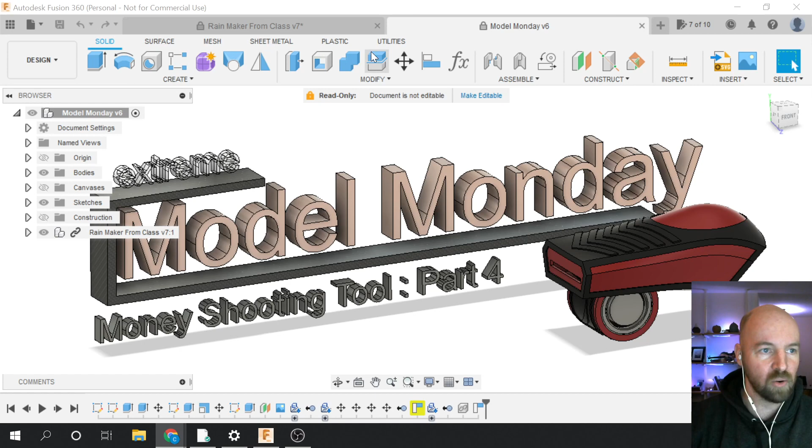All right, so I'm going to go to my Rainmaker document here, and I've got my body active. Let me go ahead and change this — this is for prep. So that was just what I was making, doing a little test there.

I always tend to do things a little bit differently, try to make things a little bit better, because I end up making 3 or 4 of these drawings as we go. I do one for myself to work things out and figure out a design, and then one that's like, all right, can I do this start to finish a little faster? And then the one I do for class here, and I end up making refinements along the way.

And the refinement I wanted to make, most of it, was to the mold part. So we're going to dive in here. I'm going to start by making a new component, and I leave it up to you, your organization, if you want to make this new component.

In fact, I think I'm going to make this component inside of my body component. So the mold that I'm making here is going to live inside of my body component. I guess that makes sense to me. Also, we're going to be using parts of this body in order to make our mold, so we're going to make it inside of this body component. So I've got my body as my active component here.

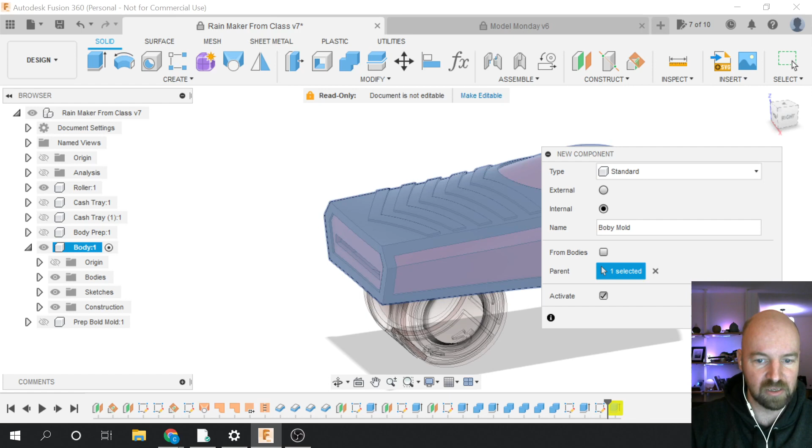All right, so now we've got our body mold highlighted here, and the first thing we need to do is use the surface body that we used to create all of the other parts of our tool. In order to do that, we're going to go ahead and need to make our body.

Actually, I wonder if we can just spin this down. Yeah, so my body mold is still my active component, but I've spun open the bodies folder in my body component just so I can see this surface body. This surface body is the one we had been using to make all the other parts of our tool here, and we're going to do that same operation here.

So with my body mold as my active component, I'm going to switch to the surface creation workspace, and from the create menu I'm going to choose our favorite command from this surface workspace, the one we've been using a lot — the Thicken command. As the face to thicken, I'm just going to choose the main body surface from our body mold here. What that'll do is use that to make a new body inside of our body mold component, if that makes sense.

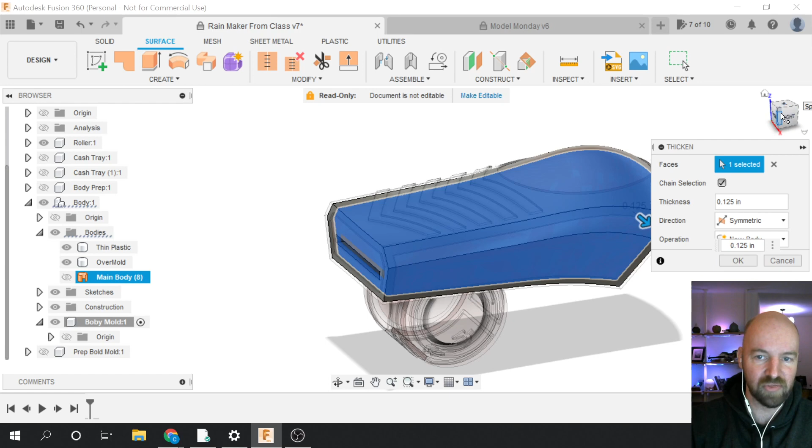And we want to make this the thickest one yet, so a quarter of an inch works for me. Quarter of an inch will expand — oh, errors. I did it the first time, made a quarter of an inch, no problem the first time. Oh, because I'm accidentally doing it symmetrically.

All right, one side. So I made a quarter of an inch, and what you want to make sure you're doing here is fully encompassing all of the parts — you want your tool to live inside of this body. So here, if I make this 0.2 inches, you can see I've got parts poking out here. The detail part of my overmold is poking out, so I need to make it just thicker than that. Doesn't need to be a lot thicker, but just a little bit thicker. So a quarter of an inch worked good for me, and then I'm going to say OK.

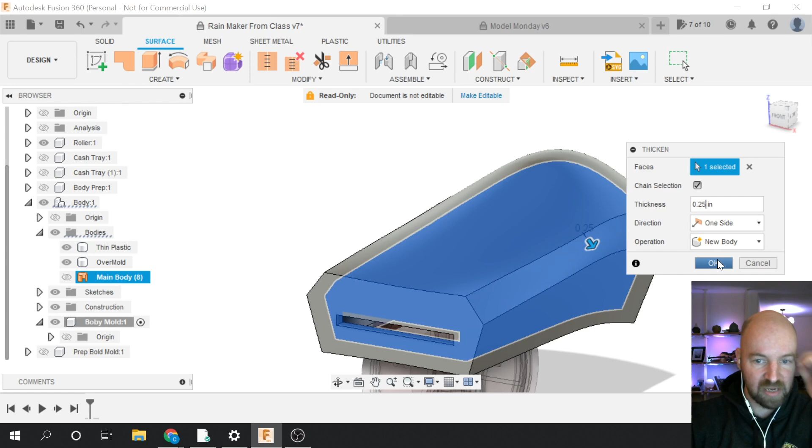All right, so now we're probably not going to need that body's folder anymore inside of this body, but our body mold component is inside of this body component here, so we will need that.

So the next step is we need to make this mold so we can separate it into pieces. It needs to be made of probably 4 or 6 different pieces that get fastened together, and then the rubber gets injected inside of it.

And in order to fasten it, we're going to need like wings, I guess you could say. Flanges is probably a better word, in order to fasten the parts together. And we're also going to need to split up this body. So let's start by doing that.

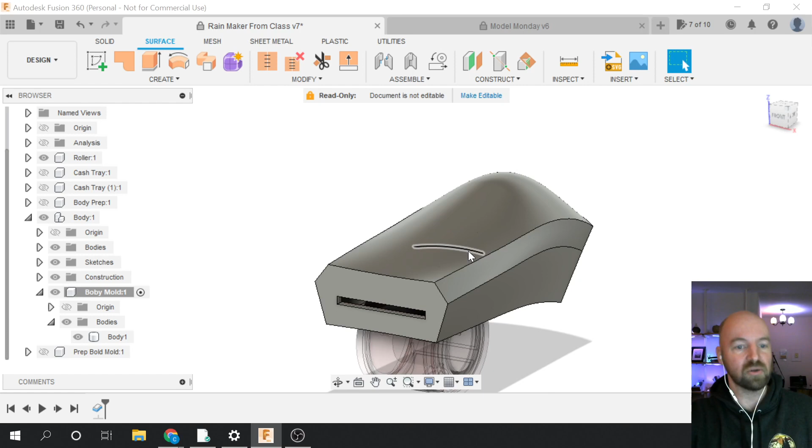Let's make our flanges first. I'd like to have a flange that's associated with each of the 4 kind of corners of my tool here. So if we can imagine kind of like an X here, I'll have flanges that are associated with each one of these corners.

So what I'm going to do is first create an axis. I want to have an axis that goes from this point here all the way to this point back here, just because those 2 points kind of represent one of those wings of the X that we're going to be making.

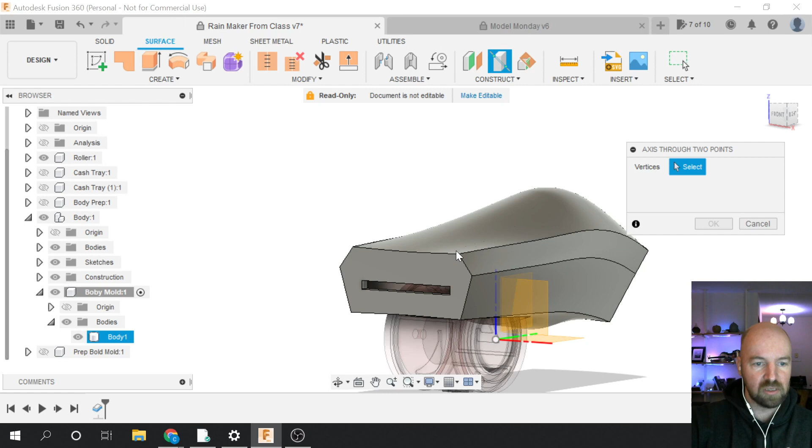So if I come up to the construct menu, we can choose an axis through 2 points. Select a point at the front, and then a point to the back. Again, I'm kind of imagining this as like a 4-part mold here when it comes to the top, sides, bottom, and the other side, so we kind of want to divide it up like that. So I've got an axis that goes through from front to back here.

And now from this axis, I'm going to use this axis to make a plane at an angle. It's kind of a long walk here to make this flange, but as we keep going, you'll kind of see the process unfold here, hopefully.

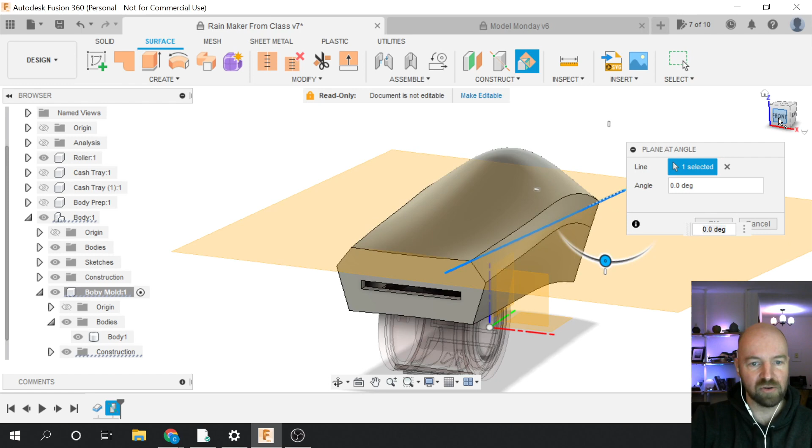So from that axis, I'm going to make a plane at an angle. In the construct menu, I'll choose plane at an angle. I'll specify that axis as the line that I want to make my angled plane based off of, and now I'm going to spin this around to 45 degrees.

We want it to be a 45 degrees like this, as opposed to a 45 degrees like this. So this is negative 45 degrees for me, but depending on how your model is oriented, positive 45 could be the right answer for you. But we want it to be a plane that doesn't cut through the center of our tool, it kind of runs tangent to it. And I'm going to say OK here.

This has been a long walk, but we need to make one more plane, and that's going to be an offset plane from this plane. Sometimes I like to make these planes reflect the things that are going to be on them, so you can always hover over the side of this plane and shrink it in or out. Again, this is just a purely visual representation. These planes go on infinitely, but it's nice to keep things visually organized and not have giant planes for things that are real tiny.

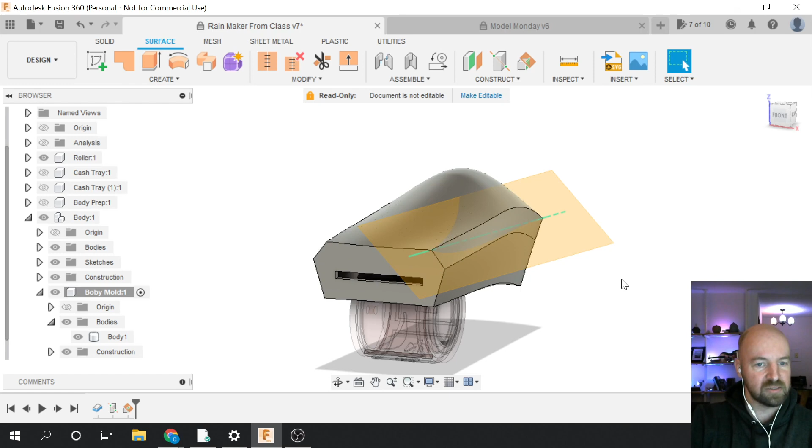All right, so the last plane that we need to make here is a construction plane that is an offset plane. We're going to offset it from that plane that we just made by 1 inch.

Now, 1 inch is good for me because I don't have any really big bulbous areas that are encroaching way out here. So if your shape has areas that encroach and get bulbous out towards the edge, we want to have some meat - this shortest distance between this plane and our tool is going to be the shortest flange that we're able to clamp to. So if your plane is kind of close to your body, you might want to go with more than 1 inch, but 1 inch seems good for me. And then I'm going to say OK.

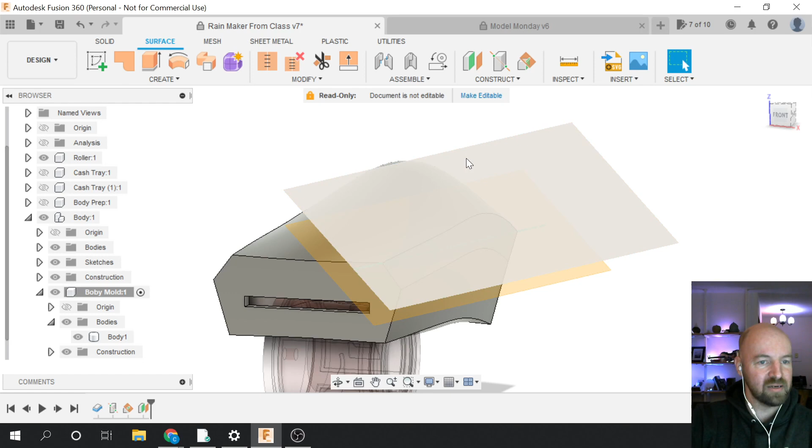Now, finally, we can make a sketch. So on that plane that we just made, let's go ahead and create a sketch on that plane. From the Create menu, I'll choose the Create Sketch option. And then, because I've got a lot of planes going on here, I'm going to make sure that I click on the plane that is furthest away from my body as the plane that I'm creating a sketch on.

And now, on this plane, I want to project this curved line. This curved line was kind of the basis for my axis that I made. So this curved line goes from one side of this axis to another, and it's kind of one of the 4 X's that we're going to be making here.

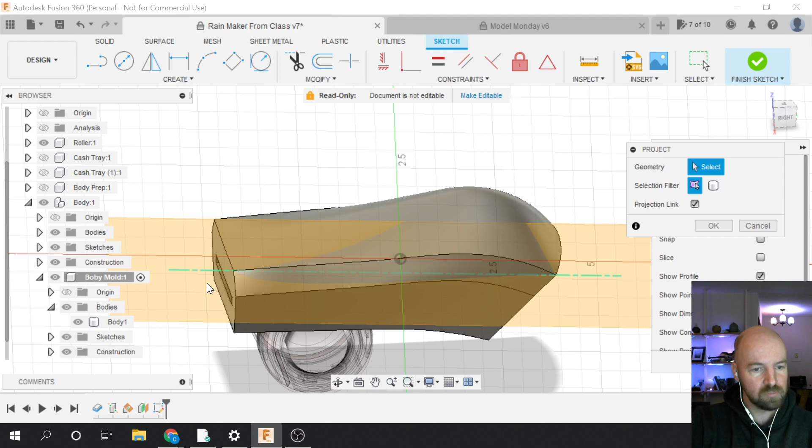So in order to project that line over onto this sketch that we're making, from the Create menu, I'm going to choose the Project option, and then scroll over to Project. Now I'm going to hover over that little curved line there, highlight it and click on it one time, and you can see I'm projecting over that purple line there, and then I can say OK.

I wonder if we don't need to. Let's try to roll with it like this. In my earlier drawing, as I was prepping for class here, I extended out these lines a little bit. I made them go beyond the body here, but that made me run into problems later. So we're going to wing it here, and we might need to come back and extend those lines out. So now that I've got that line projected, I can go ahead and say Finish Sketch.

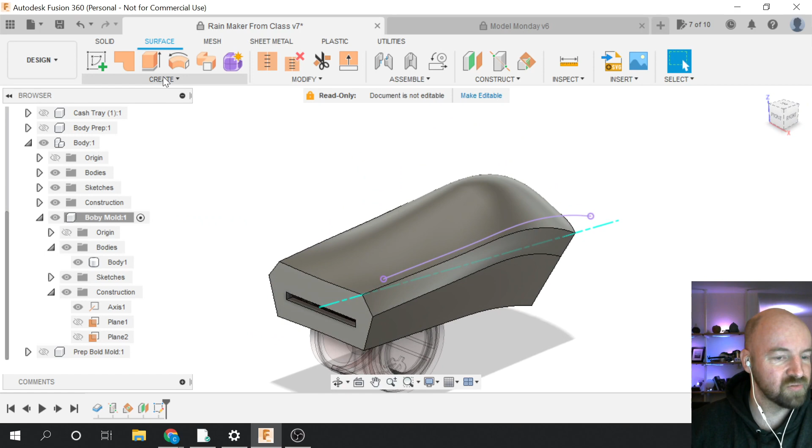And now we can create our first flange. In order to create that flange, we're going to start by extruding out this line. In the surface workspace, you can extrude just a line. So from the Create menu, I'm going to choose the Extrude option. You always know when you're in the surface workspace because all of your tools are orange, as opposed to the solid workspace, where all of your tools are blue. So I'll choose this orange Extrude option from my Create menu. The profile that I'm going to extrude out is that weird curved line.

And now I'm going to extrude this towards my tool. I'm just going to make sure I go inside of that tool. So this would not be far enough. I've not gone into the tool, and we want to go inside of the tool a little distance there. That excess will get cut off later, so you want to go inside of your tool mold body there. All right, and then I'm going to say OK.

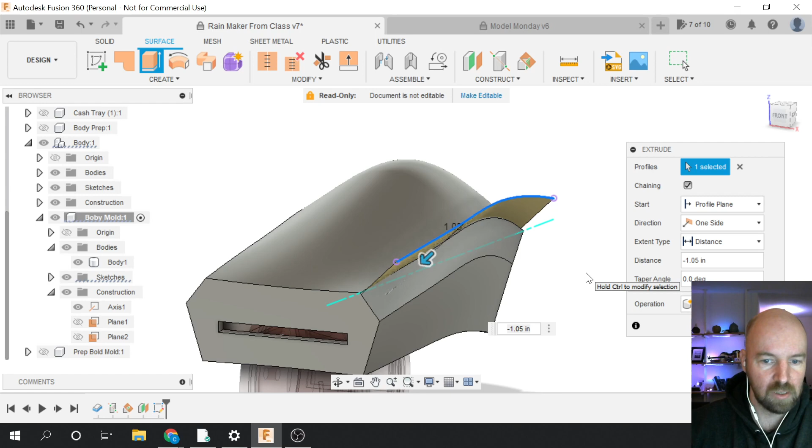All right, now, just like we made our body and our mold using the Thicken command, let's go ahead and name some things here. We've got a bodies folder, and the one thickened body that we have is going to be our mold. And then we've got a surface body here, and I'm going to name them 1 through 4. There are going to be 4 of these things, though 2 of them are going to be mirrored. So this is, I don't know, quad 1.

Anything is better than body 1, body 2. So quad 1 is fine for me. I suppose it could be flange 1; that would probably make more sense. All right, so now this surface body, we're going to thicken it just like we've been doing. So I'll click on Create, and then come down to this Thicken option. As the face that I want to thicken, I'm going to pick the quad surface body in my bodies folder.

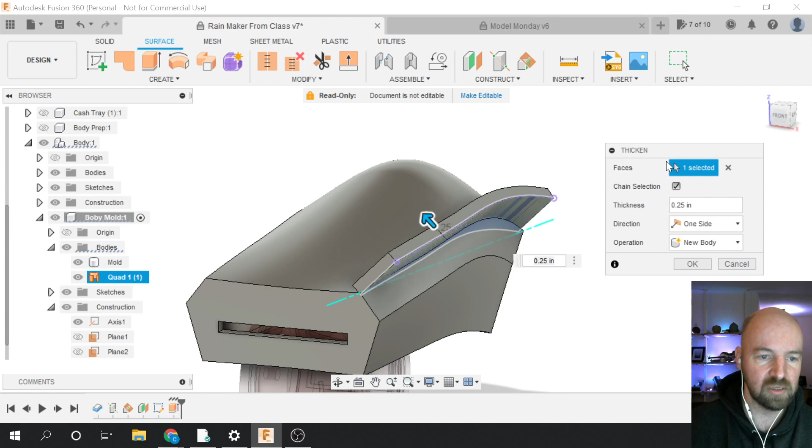And now, crucially, instead of thickening this in one direction, oh, and you know what? I can see I did not go far enough. All right, so I'm going to change this from one side to symmetric. It only needs to be like 1/8 of an inch in each direction. I think 1/8 of an inch each direction is fine for a flange.

And instead of making this a new body, I'm going to say join. So I'm going to join it to our existing body. We'll worry about cutting the whole thing up in the next step. All right, so I'm saying join, and I'm saying OK. And now we can kind of give an inspection here.

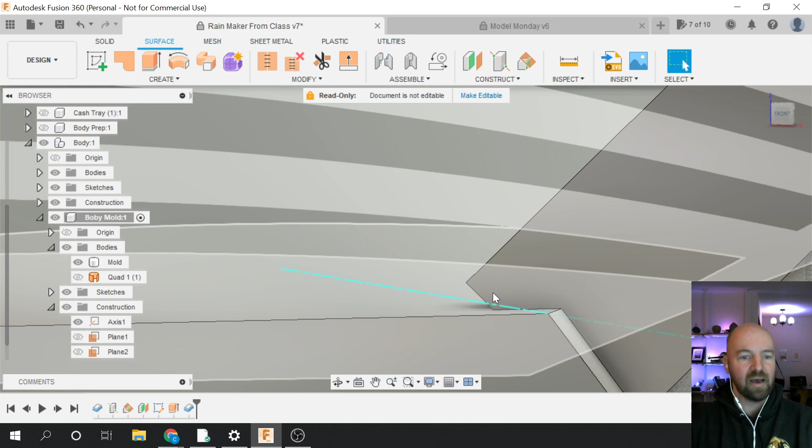And I can see that if I zoom in, it doesn't go out. I've got a little corner. I want it to be intersecting all the way around. And I've got this little corner here because I didn't extrude my flange surface body in far enough. So let me look at the back and see how we're doing. The back looks fine.

So all I need to do in order to fix that is, down here in my timeline where I extruded this flange here, or this quad is what I called it, I just need to right-click on it and say Edit that feature. And now I can move it in just a little bit further. And now when I say OK, I pop back into the present, and you can see that it's meeting up real nicely. Now I've got a nice corner there.

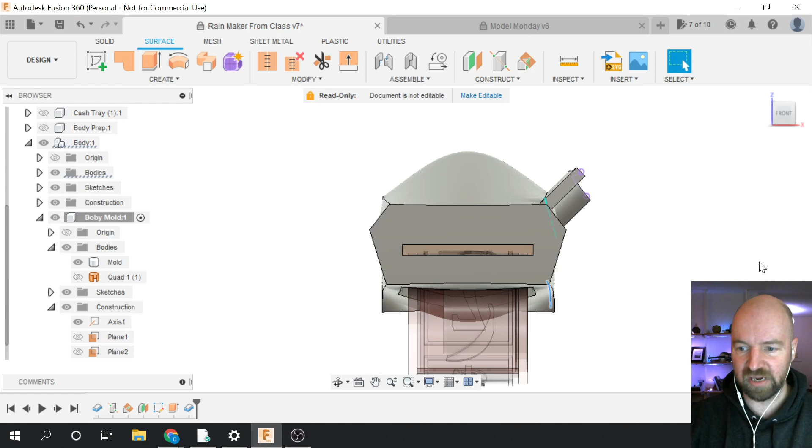All right, so let's do that to the bottom corner. We're going to do that same operation to this bottom edge down here. So first of all, let me do a little check-in. Did you follow that okay? We're making a weird shape here. Cool? All right. Sort of? Okay, cool. We'll do it again in this bottom one here, and then maybe some of the questions that you had will get answered here. So we're going to do that same operation.

So I'm going to connect the front point here with this point back here by making an axis through those 2 points, right? So from the construct menu, I'm going to choose the axis through 2 points. I'll pick the point on the front of my tool and the point on the back of my tool. I think I missed. There we go. All right, so now I've got that axis made, so I can say OK.

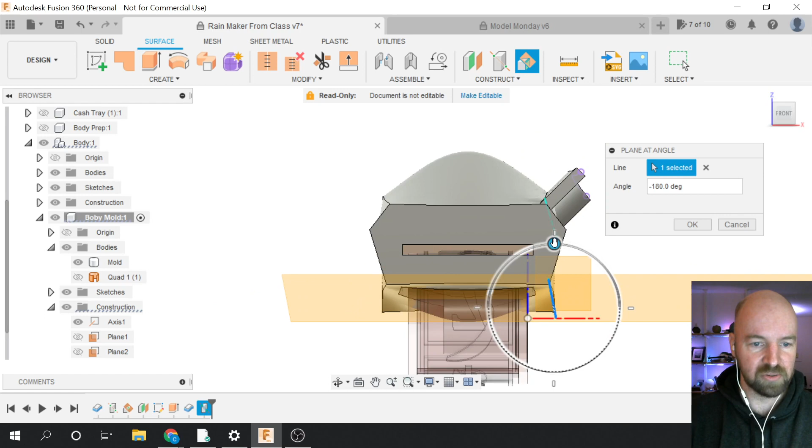All right, and now I can use that axis to create a plane at an angle. So from the construct menu, I'll choose the plane at an angle option. I'll choose that axis there. And again, I'm going to look at the front of my tool here and spin this axis around so it is the right way. Like if I just type in 45, there we go. 45 works for me again there. But it could be a negative 45 for you.

So if yours looks like this, you want to change that negative into a positive or that positive into a negative, because hey, look at this. You can do a double negative and it doesn't give you an error. That's kind of shocking. You can do negative negative 45 and it's the same as a positive 45. Turns out two wrongs don't make a right, but 2 negatives definitely make a positive in Fusion 360. All right.

So I'm going to shrink this plane down just so it's not so obscenely large, because I actually only created this plane so I could create another plane from it. So from the construct menu, I'm going to choose that offset plane option again. The plane that I'm going to offset it from is that plane that we just made. And we want to move away from our tool. 1 inch is fine for me.

In fact, 1 inch is probably overkill right now. That's way out there. Because it doesn't bulge up on the top, because mine kind of curves inward, I don't need to have all that flange. So I'm actually going to shrink this down so you can see the difference here. This is only 1/2 of an inch. So I think I'm going to go with 1/2 of an inch; that'll be plenty of distance for a flange.

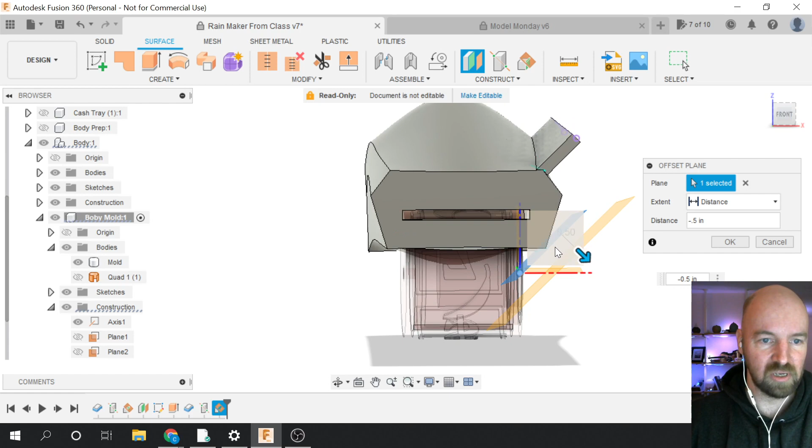And you can kind of see, based on that first one that we did, what the purpose of this plane is. This plane kind of defines this outer edge. Oh, in fact, you don't want to click on stuff when you have the extrude tool open, because it's just going to go ahead and be like, oh, that surface? All right.

All right, so now on that plane, we can create a sketch, right? So from the Create menu, I'm going to go ahead and choose Create Sketch. I'm going to highlight that plane that I just made, the last plane that I just made.

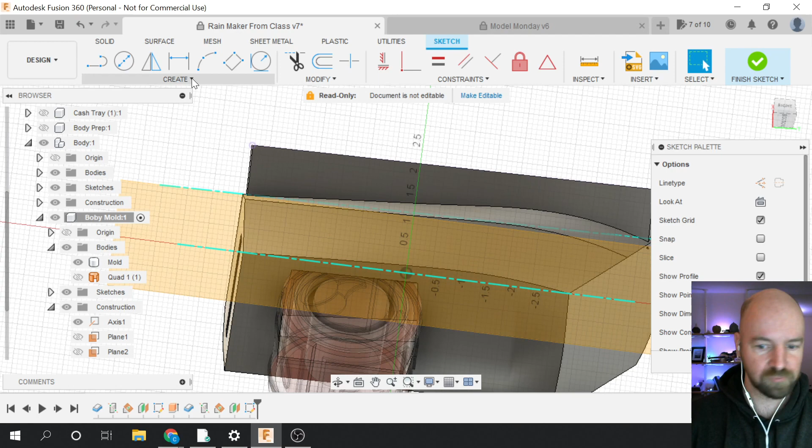And then on this plane, we're going to project over this little arc here. So this arc is the arc that had a point at each end of the axis that I made when I was kind of starting this process. So from the Create menu, I'm going to go ahead and choose the Project Include option, and then over to Project.

I'm going to highlight that curve, making sure that I just get that single curve. I don't want to get some of the various other geometry that I can easily accidentally click on. I'm going to make sure I just click on that one curved line.

It could be that you have two, well, actually probably couldn't be that you have two lines, because we made this with a loft from the front to the back. I was going to say sometimes lines get broken up, but because we made it with a single loft, my guess is none of you will have to click on more than one line there. It'll just be the one line. And then I'm going to click on OK for that project menu and finish sketch.

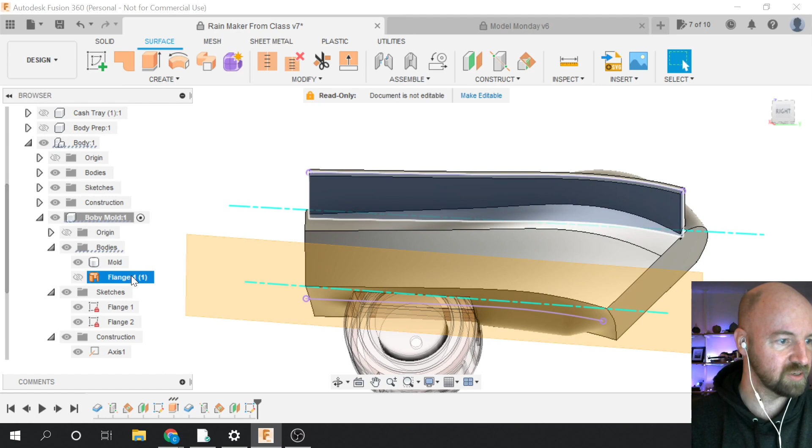All right, so I'm going to name some sketches because we've been trying to stay organized and now I got a little bit behind. So the first one is Flange 1, and the second one is Flange 2. In fact, I like that better than quad. So I'm going to rename that first surface body that I made. I'm going to change it from Quad 1 to Flange 1 because they are what we are indeed using to make our flanges. So that makes more sense, I think. All right.

Now, from this line, we're going to extrude it and make our flange surface. So from the Create menu, I'm going to go ahead and choose that Extrude option. I'm going to choose this line, this curve that I had projected over onto that plane that we made. And I'm going to move it into my body, I don't know, 1 inch or so. Again, it can go in further. It just needs to go in far enough. And we may need to do that same operation that we did the first time around when mine didn't go far enough. But I'm going to go ahead and say OK.

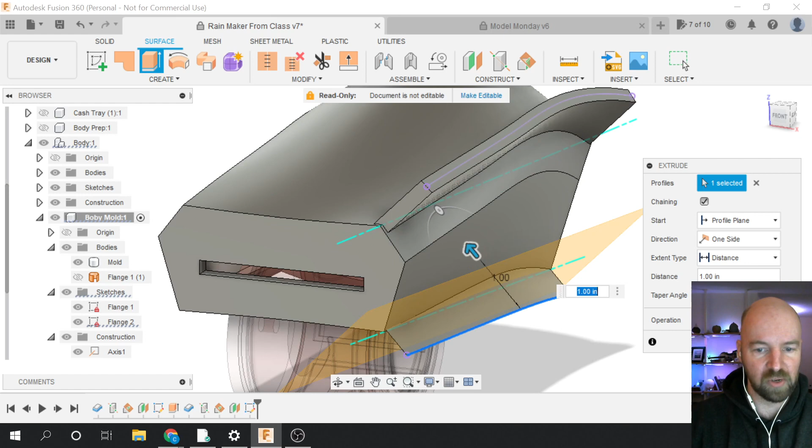Now that I've got that flange extruded into there, I'm going to turn off that construction plane just because I think it's an eyesore. It's kind of in the way visually. And now, same thing that we did here, we're going to use that Thicken command, our favorite command from the Create menu inside of our Surface workspace.

And we are going to thicken that surface that we just made the same amount. So one of the nice things about this Thicken command is it remembers your last specified parameters. So the thickness here is going to be symmetric and 1/8 of an inch in each direction, which I think will be fine and dandy like sour candy. And I'm going to say okey dokey. All right, so we are getting close, believe it or not.

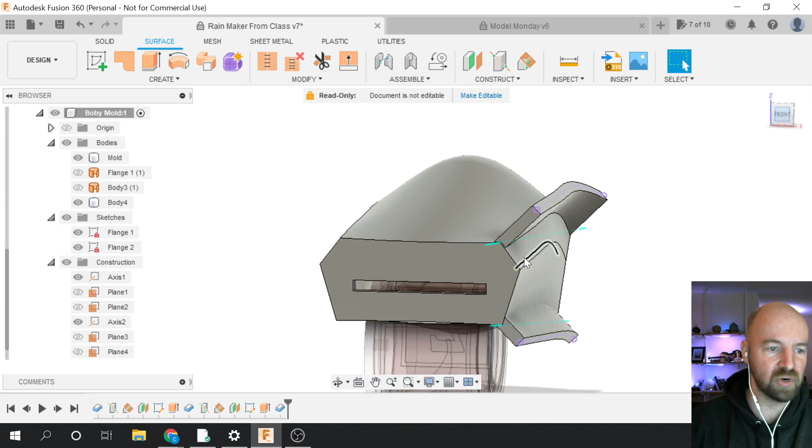The next step that I'd like to do here is I'd like to create these two flanges over on the other side here. So the other side of my body, thankfully my tool is symmetric, and hopefully everybody's tool is symmetric. If your tool is not symmetric, you'll have to do this over there for those other flanges. But my tool is symmetric, and I'm just going to assume yours is too.

So with that being said, I think we can use the Mirror command. So from the, oh, and you know what? First we need a plane to mirror across. And this is where it's going to be really helpful that we were good at naming our bodies and naming our construction planes, because I'm pretty sure that at some point we had a construction plane that cut our tool in half

that we probably named. Was it with our cash tray? Was it with the roller? Gosh, I might be wrong. Maybe we haven't. I feel like I thought we did. I thought with our body maybe. Back plane, front plane, overmold.

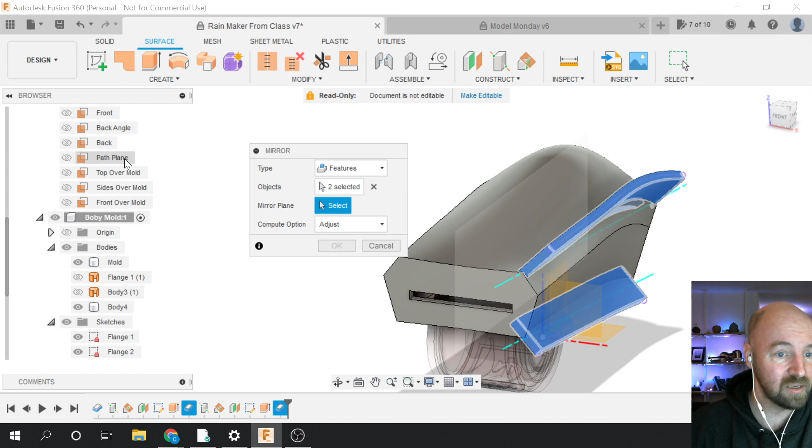So the thickening of the two flanges is the feature that I'm going to mirror, and then hopefully, look at that. I think it's going to work just nicely. All right. So as the mirror plane, I'm going to choose that plane that we had earlier made that bisects our model right in half there.

I don't think it's going to make a difference which one of these you choose. I'm going to choose identical, but again, I don't see a difference in this case between these three compute options. In fact, I've never seen a difference between those options. I'm not sure what they're for, but I'm sure they're for something. But I'm going to go ahead and choose identical, and I'm going to say OK.

Oh, look, we didn't get one. One didn't work. So let me try that again. I'm going to go ahead and say mirror. Find that. I'm just going to do one at a time, I guess. Choose the path plane. It worked that time. So the first mirror, it wouldn't mirror over my body one. I had to do it a second time here.

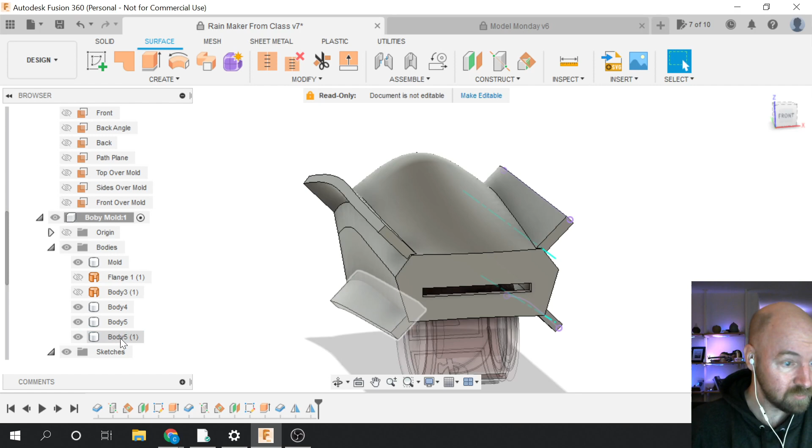Now, when it mirrored, it did not join those flanges to our main mold body. So let's go ahead and do that now. Oh, in fact, I forgot to do that for the second body that we made, but that's okay, because we're going to do that right now. If you've got more than one mold body, we're going to join them all together and make them one big happy mold family. So I'm going to jump into my solid workspace for a second here.

And from the Modify menu, I'm just going to go ahead and choose Combine. The target body, the thing I want to combine the other bodies to, is going to be my mold body here. And then the tool bodies, the bodies that I'm going to add to my target, are going to be each of the flanges, one that I forgot to make join when I extruded it, and the other two are the two flanges that I got when I made my mirrored feature there.

I'm not going to choose to keep the tools because I don't want to have these bodies left over after they're joined, so that keep tools checkbox is unchecked, and I'm going to say OK. All right, so we've got our side flanges done. We need to make a front and a back flange. So let's do that next.

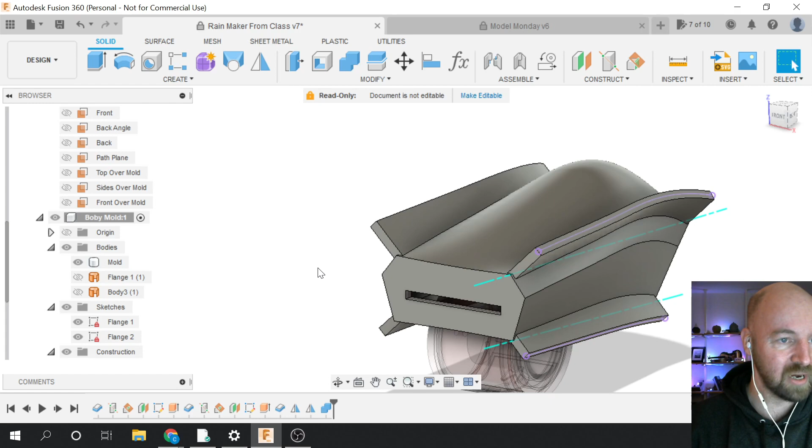So in order to do that, we're going to create a sketch. So I'm going to go ahead and click on Create, and then Create Sketch. I'm going to create that sketch on the front surface of my mold here. So the very front surface of my mold is a flat surface. I'm going to use that to create a sketch on.

And this sketch, I want to encompass all of the side flanges. So in order to do that, I need to have some points that represent the outer points of these side flanges on this sketch. So I'm going to project those over onto this sketch from their existing geometry. So from the Create menu, I'm going to choose the Project option and then over to Project. And now the items that I'm going to project are just points.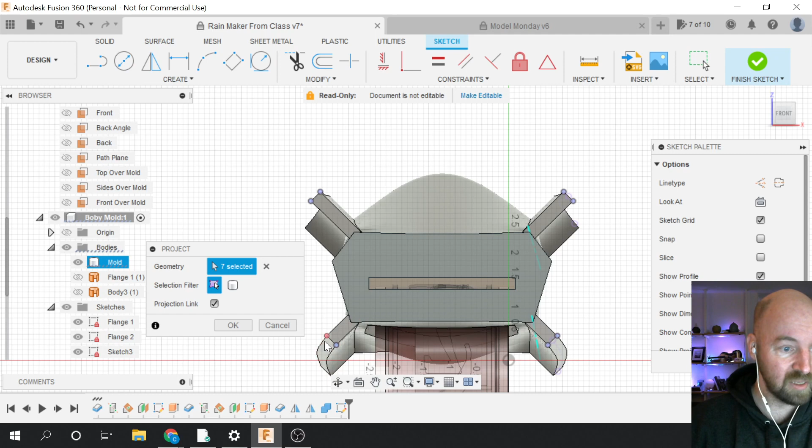So each of the furthest out points on the front of my side flanges, I guess there's going to be 16 of them? Nope, 12 of them. Nope, 8 of them. I can do math. So it's each of the corners from the front of my side flanges, if that makes sense.

And once I've got those projected, I can say OK, and I just need to connect those dots now. So I can grab my line tool, and I can just connect each one of those dots to each other all the way around the outside of my tool. So I'm encompassing my flanges and making a nice big flange at the front of my tool simultaneously. And then I'm going to say Finish Sketch.

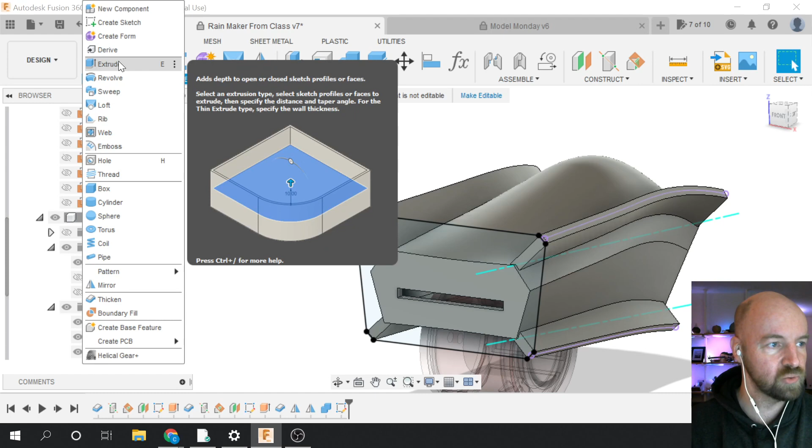All right, now we can extrude that area. So from the Create menu, and now I'm back here in the Solid Model Workspace. In fact, I'm going to be back here in the Solid Model Workspace, I think, for the remainder of this class here. So I'm going to grab from my Create menu the Solid Extrude option. There's just the blue Extrude option.

No. So I think the issue that I'm having here is I've got other things that are visible, and it's like, oh, do you want to click on this? Do you want to click on this? No, I just want to click on this sketch. Thank you for asking. So I'm going to hide all of those things. I want to hide everything. I'm going to do it all at once. So there's a nice trick here.

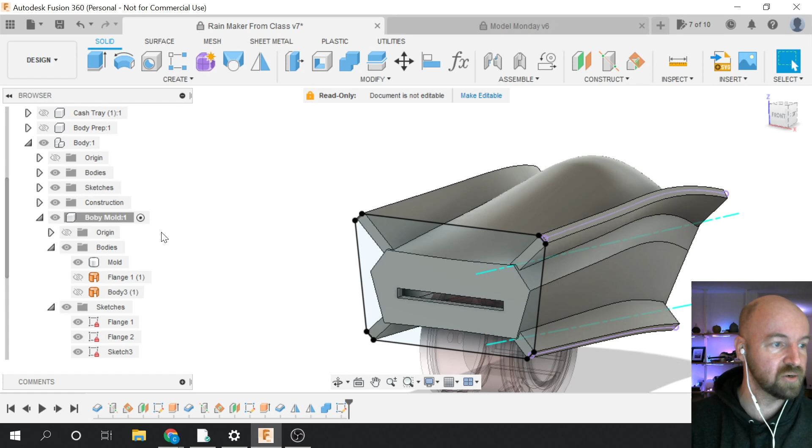If you hover over a component, I think this works for bodies too. It might even work for sketches. It does not work for sketches, but a body or a component in your browser, if you right-click on that body or component in your browser, there is an option near the bottom that says Isolate. So what this Isolate option will do, it will turn off everything that's not that object.

And now that I've got everything that's not that object hidden, I should be able to a lot more easily click on the parts of this sketch that I actually want to extrude without it jumping around thinking I want to extrude something else. Now, I'm going to extrude this back into my shape here. I think this is the mistake I made last time in my prep for class here. And we need to go back into this shape, well, it needs to be far enough that it goes into our body.

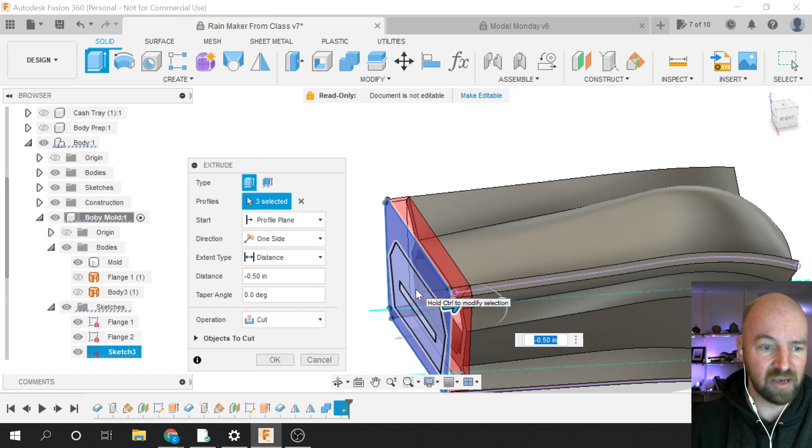I'm going to make this thicker than it needs to be. Is that right? I'm going to make this 1/2 inch because I want it to be thicker than it needs to be because I don't want to run into the problem I had before. Having a thick flange will be fine. It's worse than having a flange that's not thick enough. All right, so now that I'm done talking to myself, I'm going to make this extrude a join because I'm joining this all together here in one big happy mold family. And then I'm going to say OK.

And now we want to do that same operation to the backside of our mold. So I'm going to do all those same steps that I did for the front of my mold to our back surface here. In fact, do I probably have a body to name? I've got a sketch to name. This is our front flange. I can turn that off, turn off my side flange sketches.

I still got a body down. No, that's the flange. All right, we should have that. So I'm going to do that same operation in the back here.

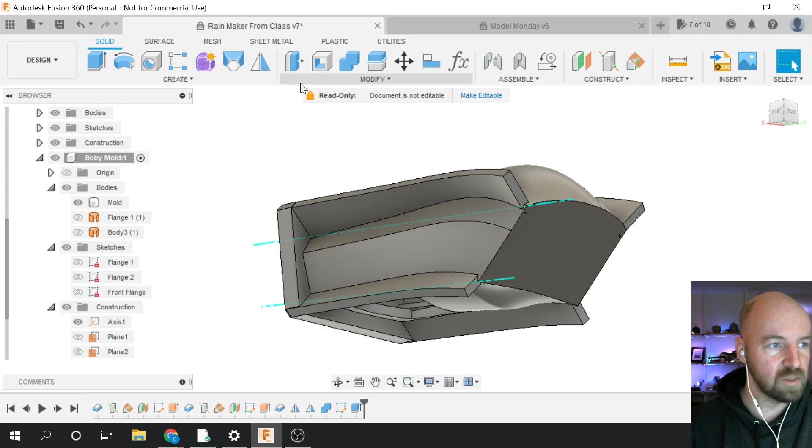I'm going to click on the Create menu and choose to create a sketch on the back surface of my tool mold here. Now I can see the outer reaches of the side flanges, the two corners that go all the way around, and from those corners I'm going to project them over onto this sketch that I'm creating.

So each one of those 8 corners from our side flanges, I need to connect those projected points after I've projected them. We're connecting those dots just with our line tool, so we've got a nice fully connected flange.

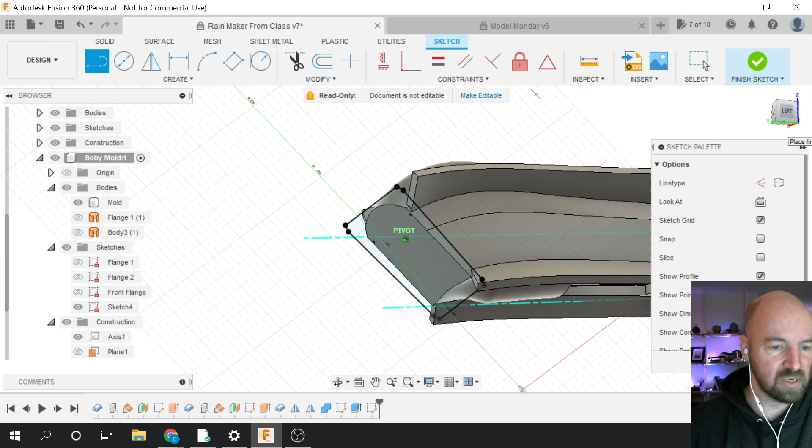I'm just going to kind of show you from the side what that looks like. All right, and now I am going to finish this sketch. I'll name the sketch - this is my back flange.

Now I've already got my mold body isolated, so I'm going to extrude out this shape, the inside and outside of that shape, in towards my model. Again, I'm going to go 1/2 inch, not 5 inches, 1/2 inch.

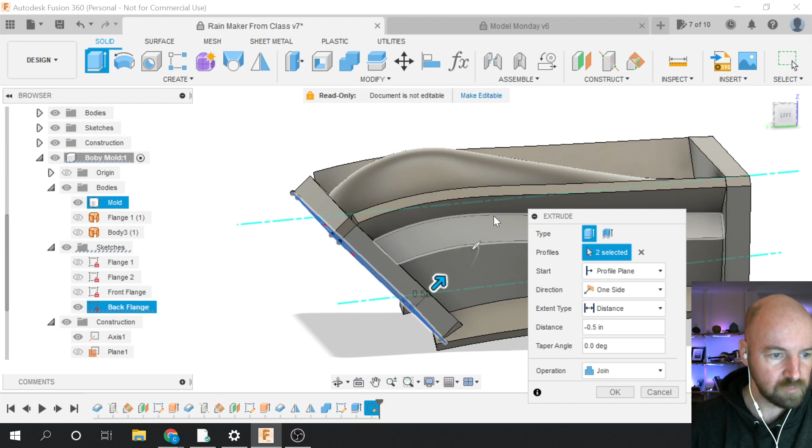If you've got a little gap up here, I think that'll be fine. Yeah, I think that'll be fine. And we're not cutting, we're joining - joining together in one harmonious mold shape. All right, so now it's all joined together, I'm going to turn off or hide my back flange sketch.

All right, so now we've got our mold body created here. However, the inside of this does not reflect the mold surface that we want the inside of our mold to have. Namely, the inside of our mold needs to conform to the shapes that we made in the previous class, the overmold shapes, right? So we're going to make that happen using the combine tool.

So right now, I'm going to need to use the other bodies that I had previously hidden with my isolate command. I'm going to right click on whichever body or component you chose to isolate initially - you have to use that same body or component to unisolate things. If I right-click on this body mold component that I used to isolate and get rid of all the clutter here, now where it's previously said isolate, I now have the unisolate option.

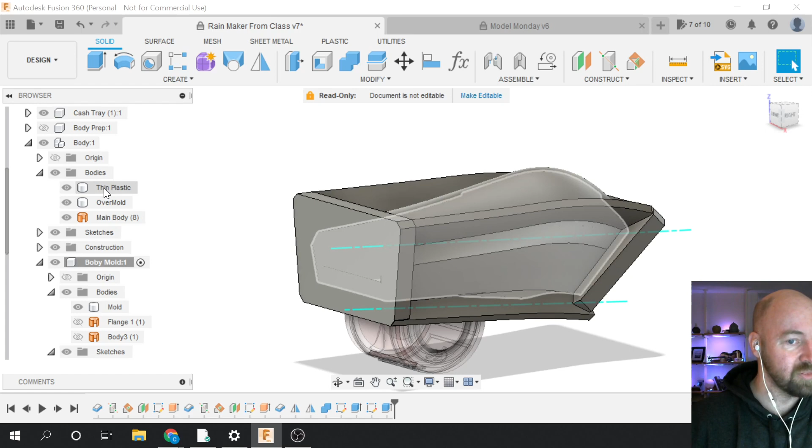So now it's turned all those bodies back on, and that's my mold body. Here we go. And now I can go and find and make sure I can see my overmold and my thin plastic here because I'm going to use those things.

So we're going to use the shape of our... I'm going to turn this off. We're going to use our existing body, our mold, and our thin plastic here to subtract away the shape from the inside of this kind of mold that we're creating here.

So from the Modify menu, I'm going to go ahead and choose counterintuitively the Combine option. If I choose this Combine option, the target is going to be my mold body here. I can spin down my mold body component and look in my bodies folder, and click on the body in the browser here if that's easier, if it gets kind of cluttered.

In fact, I'm going to do that same operation. So now the tool bodies here, I'm going to go ahead and change this from join to cut. And the tool bodies are going to be both my thin plastic and my overmold.

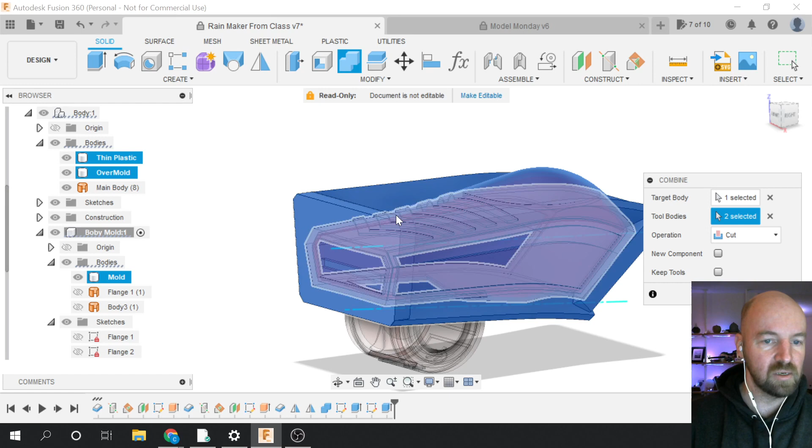So I'm going to cut those two objects away from the inside of this mold that I'm making here. Now these tools I do want to keep, so I don't want to delete my overmold and my thin plastic. We definitely want to have that keep tools checkbox highlighted here. And now I can say OK.

Now, what might happen to you is you might have more than one body now in your bodies folder inside of your mold, and if that's happening, let me show you. It's not happening for me, unfortunately, but if it's happening to you, I can show you how to view the inside of your mold, because that's kind of handy right now. We've got a hollow structure, and it'd be nice to be able to look at what the inside of that hollow structure looks like.

So from the Inspect menu, we can choose the option that's called Section Analysis.

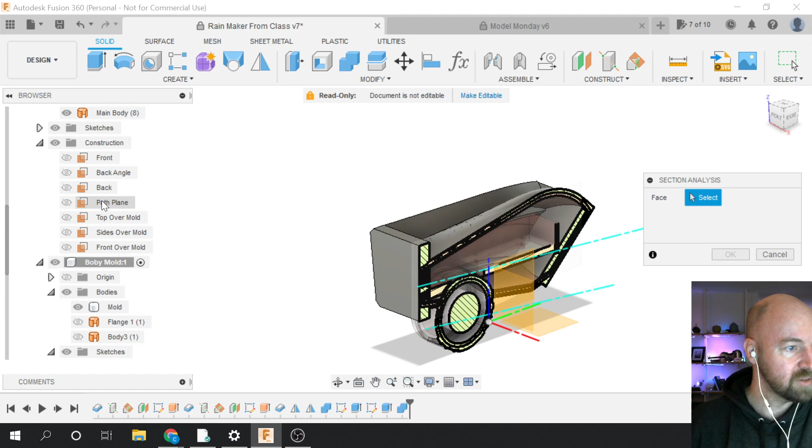So if I choose that Section Analysis option, I'm going to go up and find that construction plane that we used to split our mold in half, and I'm going to choose that as the plane that I'm viewing here, as the face I'm using to cut it in half, and I'll say OK.

Oh, what just happened? Inspect, Section Analysis. Oh, you know what, that's because I already did this and had my section analysis turned off. All right, so now we've got a section analysis here, and we've got some interesting things going on.

I'm going to use that same trick I did to get rid of all the junk except for the mold body I'm working on. So I'm going to right-click on my mold body component and choose Isolate, so now I get rid of all the extraneous stuff.

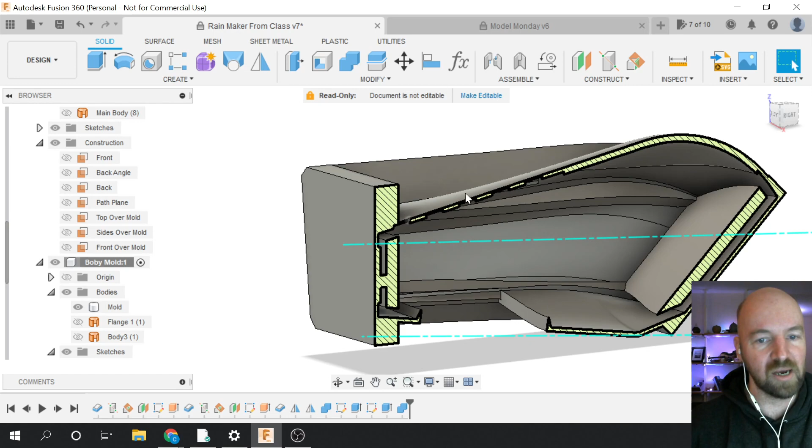And I do indeed have weird geometry going on inside here, so I'm glad I'm looking at this. Only it's not showing me I have two bodies, because they're really connected, all because of the opening in my tool here. So for now, I'm going to choose to ignore that they're all connected. Hopefully that won't come back to bite me in the butt in a couple of minutes.

If you've got just random floating bodies that you can turn off and on, if you've got multiple bodies in your bodies folder after subtracting it away, and is that going to be thick enough?

Well, we're about to find out. All right, so now I'm going to turn off my section analysis, so I'm back to looking at the whole thing again.

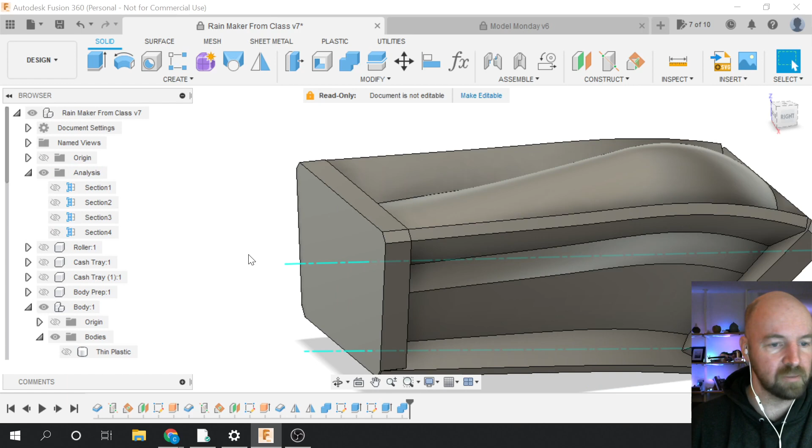Now let's split our mold body up into its individual mold parts. So in order to do that, first I'm going to subtract away the front, the part of the mold front that's going to break away.

And the part of the mold front that's going to break away is going to be based on, I'm going to unisolate. Oh no, apparently that wasn't what I used to isolate. This is what I used to isolate. I'm going to unisolate my mold body, my body mold, excuse me. I'm even going to... I'm not going to do that.

All right, so from the Modify menu, I'm going to choose this option that is Split Body. Now, the body I'm obviously going to split is my body mold, and it's the body in my body mold component that I called mold.

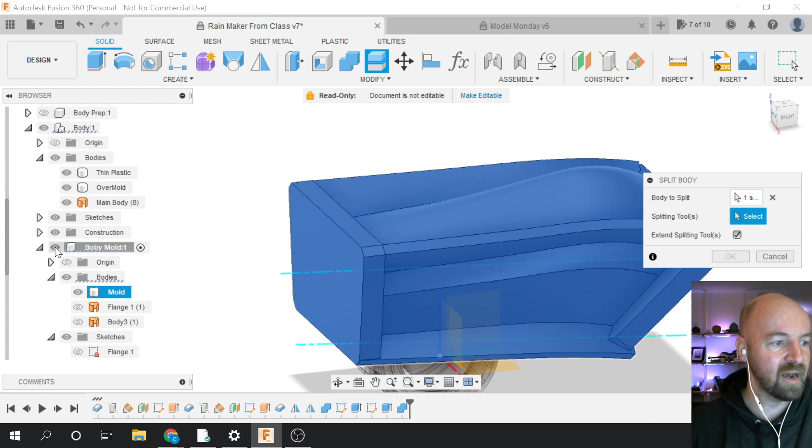And the splitting tool we are going to use, I'm going to turn off or hide my body mold component, because the surface I want to use to split this body mold is going to be... is it the inside surface? It's the surface of the front of my opening of my tool here.

So this surface is kind of raised up, and this surface is lower down. This is my overmold furthest-out surface, and this is my thin plastic furthest-out surface. I think that's the surface I want there.

And now I can turn back on... oh, that's not the body. Yeah, no, that's the body, it's the component. All right, now I can turn that back on, and I can say extend splitting tools is good. I'm going to say OK. And now in theory, yes.

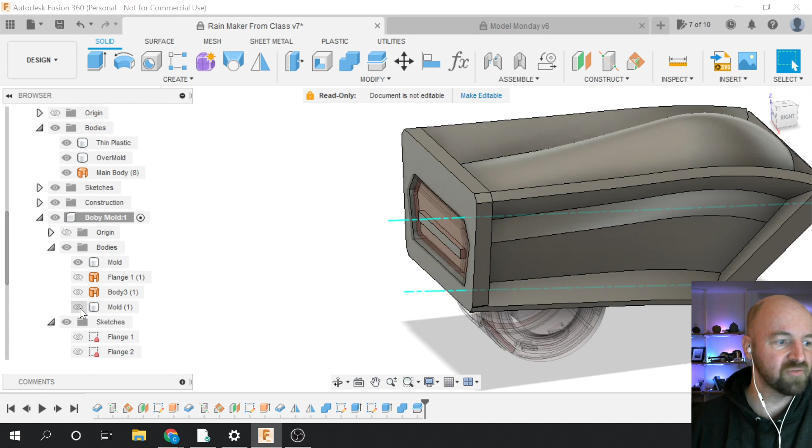All right, so now you'll know you did that right if you end up with two bodies, and when you turn off one of them, so this body here represents the front of my front flange there, if you turn off that body, you can see through to your mold. So I can see through my mold to my actual tool.

If you cannot see through to your actual tool, you're going to need to go back again. If I right-click and say Edit Feature, you'll need to check and make sure you tried using a different splitting tool. You want the splitting tool you use to be the one that cuts through and reveals all of the mold on the inside of the front of your tool there.

We're going to go a couple minutes late. Is that okay for you guys? Cool, all right, so we'll do that.

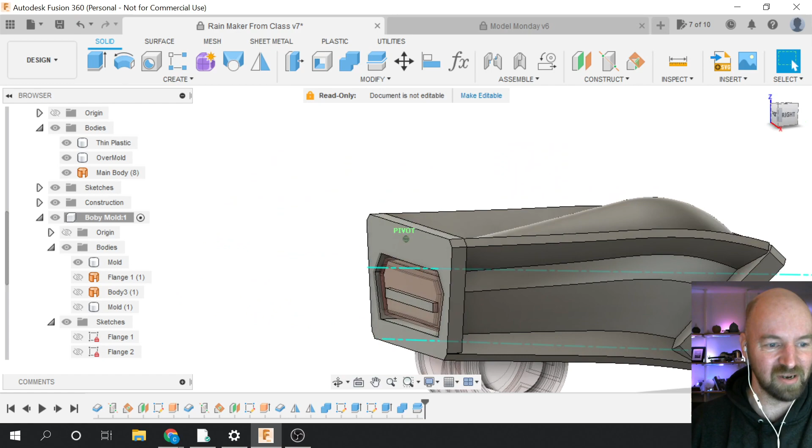Thank you, I try not to take up more than an hour of your Mondays, but we're going to do that same operation to the back here.

So, in fact, here I've got a mold. I should probably name this mold front, just so I don't get confused, because we're going to have lots of mold parts, 6 of them to be exact. I'm going to do that same operation in the back here.

I'm going to come and grab my modify and split body. The body that I'm going to split is my mold body inside of my body mold component. If I could only name things more confusingly, that would be great. And then the splitting tool that we want to use is the back surface of our tool.

So the back surface of my tool, I left all one homogeneous overmolded glory. So I left it in its phenomenal overmolded glory. There's no detail back there, so it's easy for me to pick which surface it is.

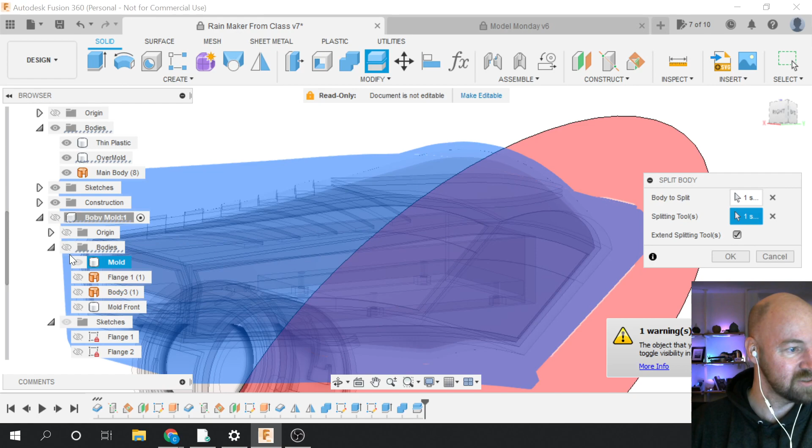And now if I say OK, now, yep, now I can do my double checking there so I can see, oh, I've done that right here. And I can name this my back mold. All right, and now I can turn off my back mold, and I've got my front mold hidden as well.

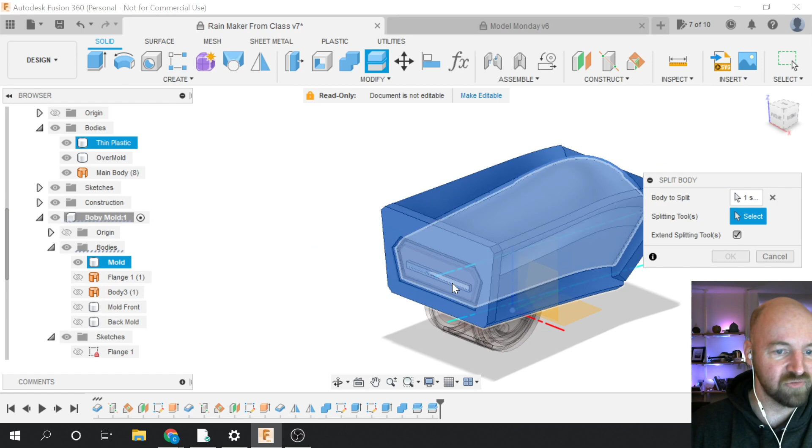Oh boy. All right, so now we're going to split up the remainder of our body. We're going to use our flanges that we made here. So from my modify menu again, if I choose to split the body, and I choose our mold body as the body we're splitting, this time my splitting tool isn't going to be a flat face. It's going to be one of our flanges, one of our two flanges that we made, the flange surfaces that we made in order to make our flanges thick here. This is the reason why we made them thicken symmetrically.

So now, when I choose to split this body on that flange, I don't think I want to extend my splitting tools here. It should work just like that. Error. I got an error. All right, so let's try that again.

Modify, split body. That's the body I'm splitting. I'm going to choose my flange there. This time I'm going to choose to extend my splitting tools. It'll make us more work later, but if this is the only way that it will work, and for me it wouldn't work any other way, so we're going to roll with that.

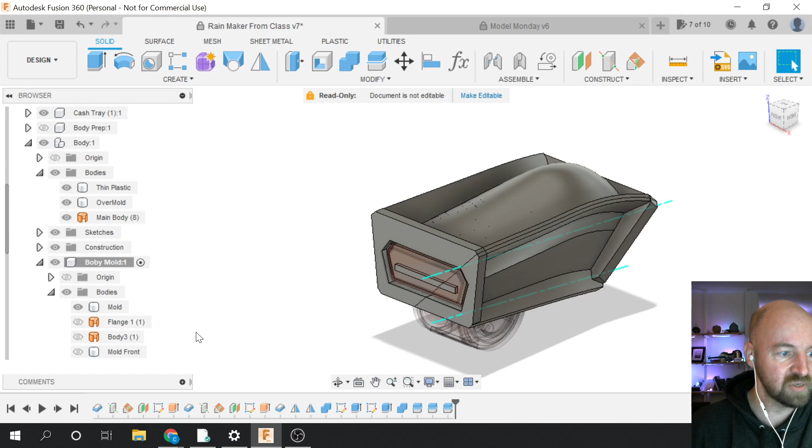So now I've got a split going through here, and now I'm going to do that again with the other surface that I had down here. So the other flange surface that I created, that was the lower flange surface, which should be called flange 2.

All right, now I'm going to go ahead and from my modify menu, choose to split a body. Now here you got to be kind of careful because we've split our body in a weird way, so we got to click the right body to split. I'm going to choose to split this body because our goal here is we're segmenting away the side here of our mold here. That makes sense. All right.

I'm going to extend my splitting tools again. Actually, I'm going to try not to and see if it gives me the same error. Yep, won't let me do it. All right, so you really got to extend your splitting tools. Flange 2, extend splitting tools. I'm going to say OK.

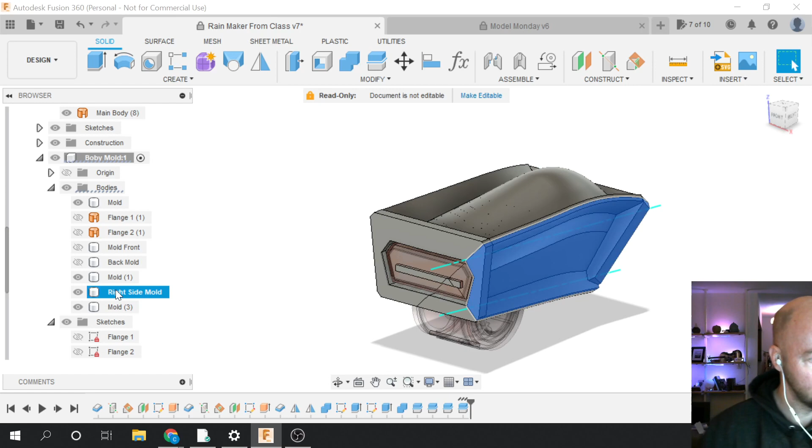All right, so now we've got one side of our molds here. This body here, this shape, is a completed shape. So I can rename that to right side mold, and I can hide it. So once I hide things, I know, all right, I'm done with them. I don't got to touch them again.

Now, actually, I wonder if we can, if it'll let us mirror over these splits. So let me try that. I'm going to find that mirror, that construction plane that I was using as my mid plane. Make sure I know where that's at. I'm going to choose the mirror command. I'm going to mirror features. I don't know if it's going to let me do this, but the two features that I'm going to mirror are the two split bodies that I just did. And the mirror plane is going to be, oh, it might work.

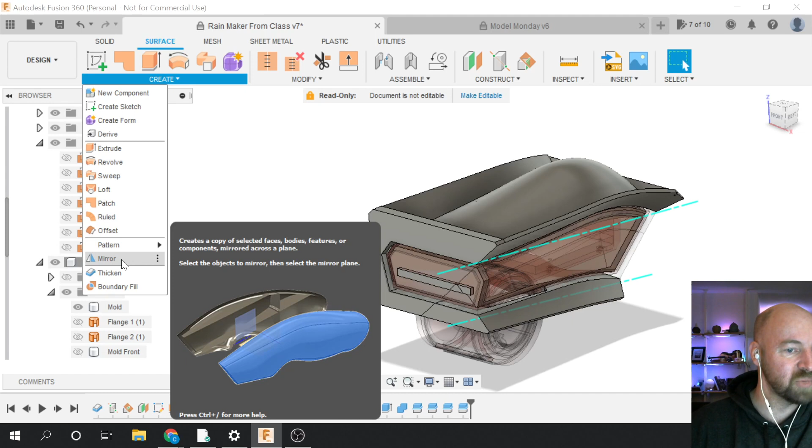Nope. All right, so we'll just mirror over my two surfaces. So I'm going to go back to the surface workspace. I'm going to choose from the create menu. I'm going to choose to mirror. And then instead of features, I'm mirroring bodies. We're going to mirror the surface bodies.

So those two flanges that we just used and that we drew initially at the very beginning of class here, we're going to mirror those over the center. We probably could have mirrored those initially and then chose to thicken them, and then we wouldn't have needed to do it now, but just order of operations, we did not do that.

All right, so now I've got these two more flanges over here, and now I can use those two flanges to cut apart the remainder of this mold body, this body mold. So I'm going to go back to my solid workspace. From the modify menu, I'm going to choose to split the body.

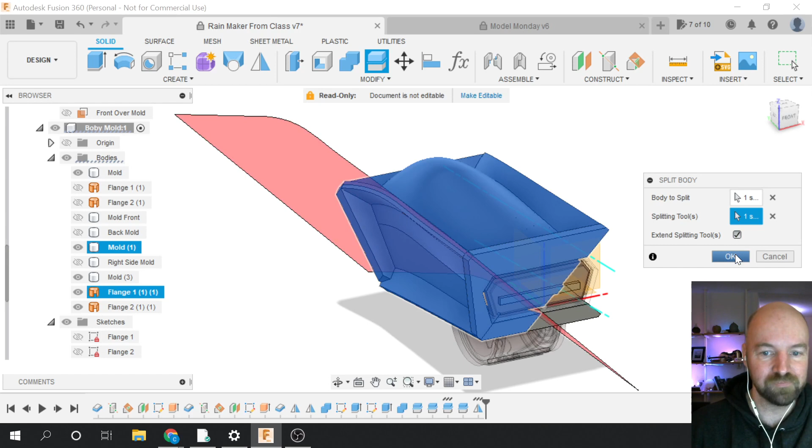I'm going to split this section of my mold here because I'm going to use this kind of top flange here. The flange that I'm using is that guy right there. I'm going to choose to extend my splitting tools. And I'm going to say OK. So I think I've got one more mold part sectioned off. But I've got a lot of extra bodies here, and we'll talk about why that is in a little bit.

So I'm just going to name this mold top. I'm going to hide it so I know that that's good to go. After I named it and I hid it, now I just need to do that operation one last time from the modify menu. I'll choose to split the body. The body that I'm splitting, for me it's called mold 1, but it's this last little piece that I need to cut up here.

And the flange that I'm going to use is this kind of lower flange there. Again, we're extending our splitting tools. And then I'm going to say OK. And now it looks like, yeah, this is the left side mold, because I called my other one right side mold.

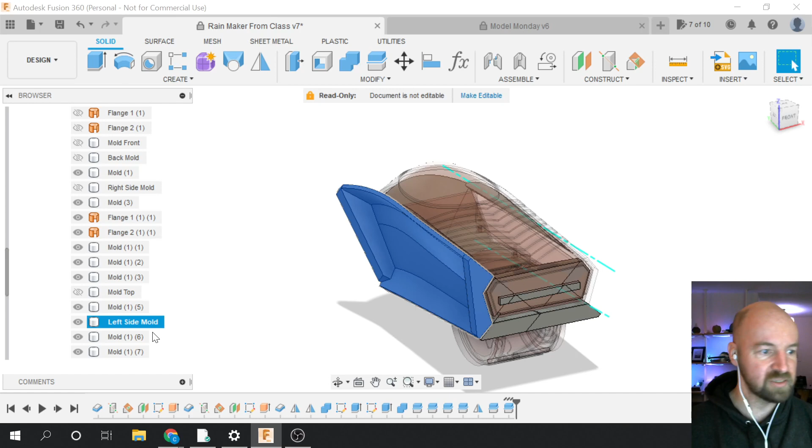All right, so the last thing that we need to do here is kind of the remainder of our mold bodies. Some of these we won't need, and some of them we need to join back together. So because I had to extend my splitting tools, we've kind of cut up our bottom mold in weird ways. So I'm going to isolate my mold body component one more time, just so we get rid of all the clutter and you see all the excess here. Oh, is that connected? I hope not. All right, so now I can kind of see the parts that I need to join back together.

So from the modify menu, if I choose combine, now you can just kind of visually inspect. So I need to join this to this. Oop, I don't want to cut. I want to join those two things together, and then I'll have kind of a complete mold bottom. I don't want to keep the tools because I'm joining here, so I want to join them both together and not keep the individual tools that made them up. And now this is my mold bottom. I'm going to hide that.

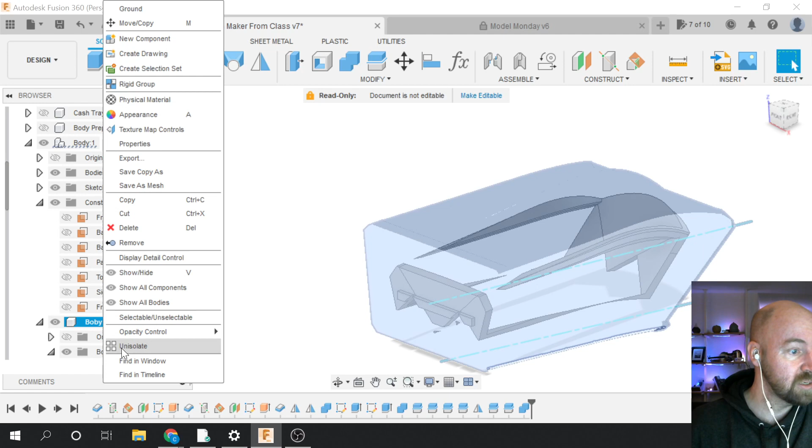So now the rest of these parts, these were parts that were inside of my mold. They were actually inside of my tool as well. So I'm going to turn back on for illustration. I'm going to unisolate, and I'm going to turn back on my section analysis. So we can see here that because I extended out the front and the back of my body mold component so far, they went inside of my actual tool, in the cavity of my tool. So they kind of got stuck in the inside of there. So they're easy to turn off.

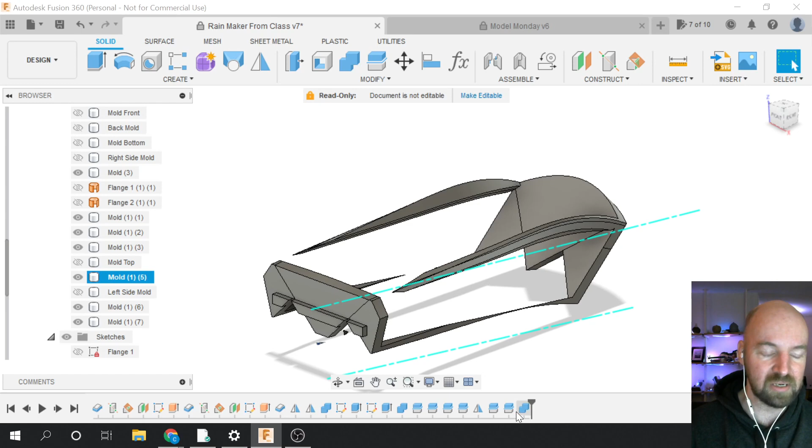If I find back my mold body component, if I isolate that again. So now there are just some bodies that I need to get rid of. Now, I would hesitate before I deleted things. In fact, I try to get people to shy away from clicking on the delete button. Because Fusion is parametric, things depend on each other for existence. If you go back and delete something that what you currently have is depending on, then the thing that you currently have might not exist anymore.

So instead of delete, what I encourage people to do, so I'm just going to go and find all the mold bits that are still on, that are still visible here, because I went through and turned off the ones that I needed.

I turned their visibility off. So the ones that I can see that have the little eyeball next to them are the ones I don't need. If you right click, instead of delete, if you choose remove, this is always, always, always a better option than delete, because it doesn't delete them retroactively in your timeline down here. It goes ahead and puts some new icons in your timeline at the bottom of your parametric layout, I guess you could say. So you could always go back in time to before you removed something, and if something is based on a thing you removed, it still kind of exists. It's just kind of not showing it to you. So I would encourage people to choose that as an option.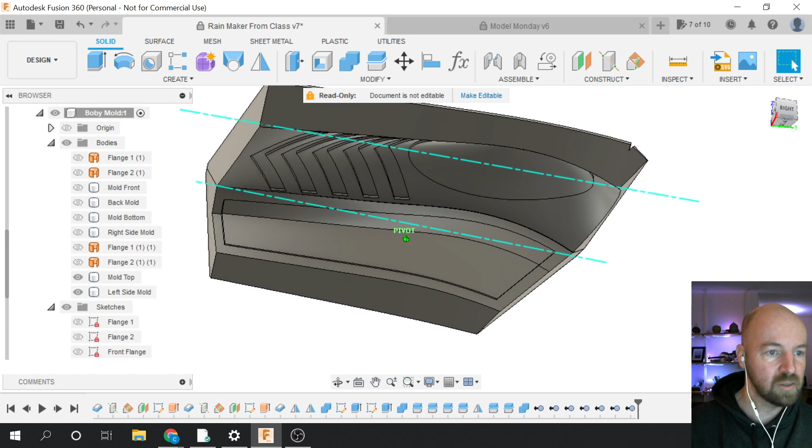So now if I turn on, for example, my left side, we can see the geometry from the inside. If I turn on the top, my mold top, that's where the real moneymaker is going to be. That's where the real payoff is, right in there. So now we've got some nice flanges. In reality, we probably want to put some holes in these flanges and fasten them together with fasteners. But especially for alignment, you're going to need to fasten these together with fasteners.

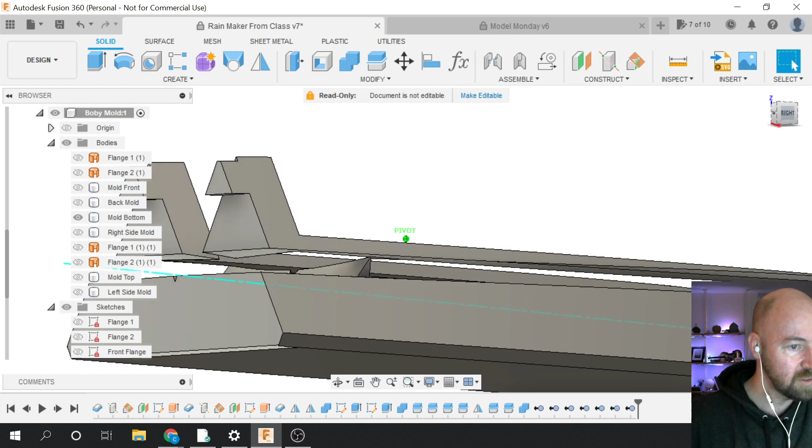But if I turn on all of these mold bodies, in fact, you know what? Let's try to fix one, because I noticed. Is it the bottom? Mold front. Yeah, I think it's my bottom. My mold bottom has got some issues here. It looks like it's just one spot. Yeah, it's connected in one spot, and that spot is probably right up here at the front. Oh, it's connected by the tiniest little bit of nothing. Just this little sliver down here. So I'm going to try to subtract that away by using one of its existing surfaces.

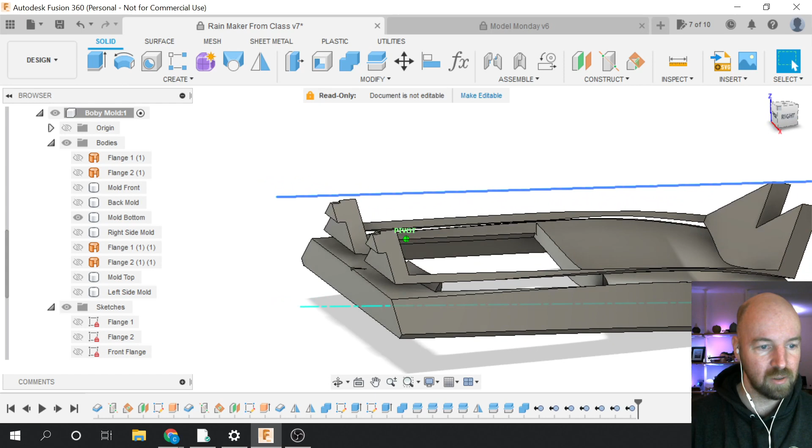So if I choose to split a body, and I'll split this body, and then if I choose as my splitting tool this surface right here, which is kind of the inside of the actual part of my mold surface that I want, and extend the splitting tools, is that going to work? Nope, I got an error. So, gosh, how am I going to get rid of you? I think this is the opening where my roller is.

Let's try that again, except let's not extend the splitting tools. Will that work? Modify, split body. This is my surface here. If I don't extend the splitting tools, it probably is not going to cut anything because the splitting tools need to extend in order for them to cut. What if... I need a surface that goes from here all the way over to the other side there.

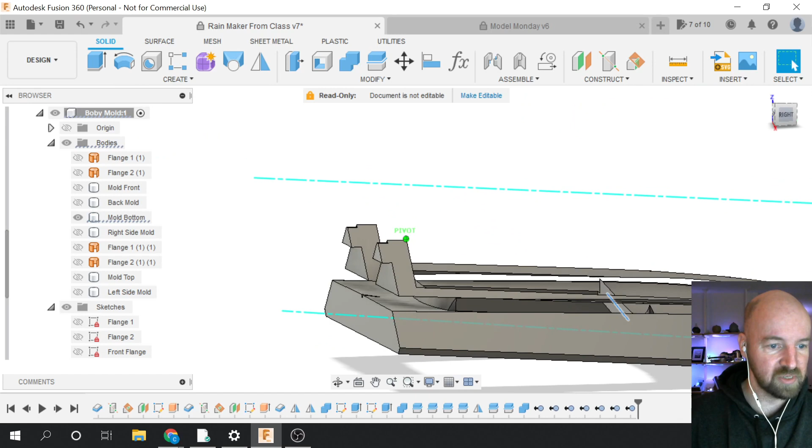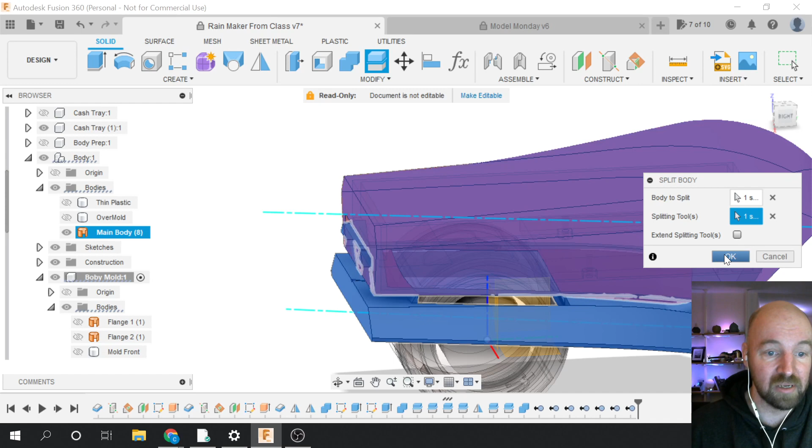I wonder if I can use existing geometry. Actually, you know what? I've got a surface already that does hopefully exactly that. If I go to my bodies, my body of my tool, if I unisolate and I turn off those things, yeah, I've got a surface already that should, in theory, cut that top off. So let's do that. So now I can choose the split body option. I can choose that tool, and then as the splitting tool, I'm going to use the main body that we made everything from, the thicken that we were thickening everything from, and in theory, damn.

Let's try that again, because is this main body? Did I cut away? I did cut away. I cut away that surface. But I have the sketch still. I have the sketch that was the front and the sketch that was the back. And because I have those two sketches, let's try this. Let's go back and make our body mold. Again, terrible name, Carl. Our body mold is our active component.

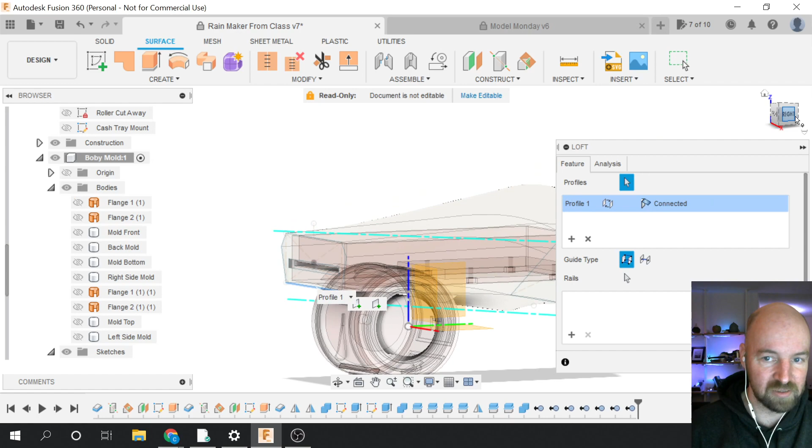And if I come over here to the surface workspace, if I choose the loft option, and I pick the line that represents the front of that tool, and I pick the line that represents the back of that tool, now I have a, actually that might do it, but I'm going to go the extra mile here. I've got to turn on my path. Yeah, if I turn on my path, and now this time I'm going to choose it as a center line.

That didn't work at all. I'm choosing the wrong center line. That. There we go. So I chose that same path that I chose initially, that I made, probably the second drawing we made in this class. And now, because I had my body mold as my active component, that surface exists right here in my body mold component.

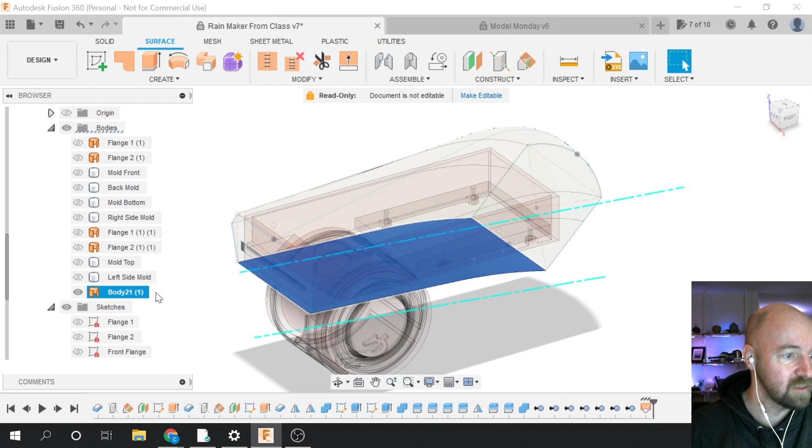Let's isolate down to our body mold component again. And I can turn on my mold bottom. And now I'll have a nice surface that I can use to split those bodies, and I don't have to extend the tool, and it doesn't give me any errors. All right, so now this is another body that I can just go, hey, remove.

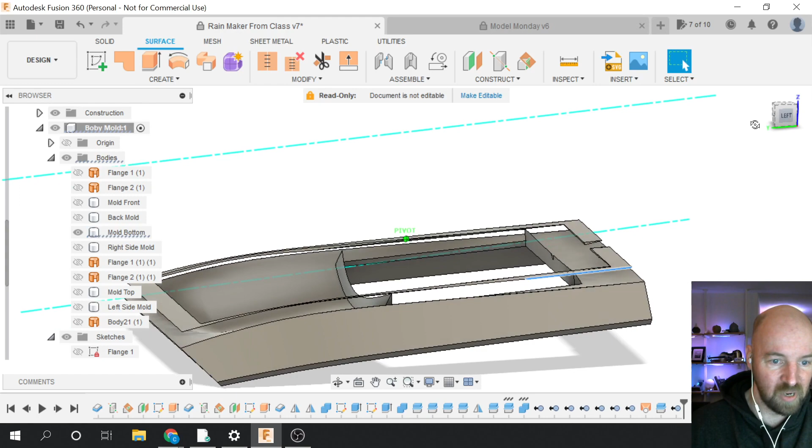Oh, somehow it didn't work. I've got a little tiny sliveret that's touching somehow, some way. I don't know how that's possible. Is this it right here? Yeah. So somehow my bodies are still touching each other. I got a little tiny sliveret that's touching right in there.

But we're gonna move on. I'm sure there's a way for us to do this, but we've already run late, and we're gonna leave it for now and call that good. Yeah. That's a problem for tomorrow me, as I say at work sometimes.

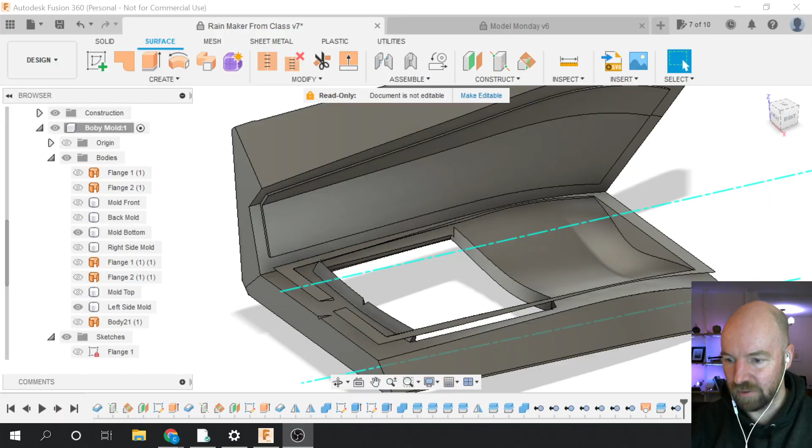And did you guys have a problem too with like random little bits inside of your shape, Harold? Sure. What was your totally different problem? Do you mind if I share your screen with the world? Okay, cool. Yeah, that'd be great. Yeah, if you go present. Cool. All right.

All right. So you just need a different surface. You need the surface that you clicked on to split that away. It just wasn't far enough in on the inside of your mold, so you just need a surface that is further in, if that makes sense. Okay, here. You mean you chose names that make sense? Okay.

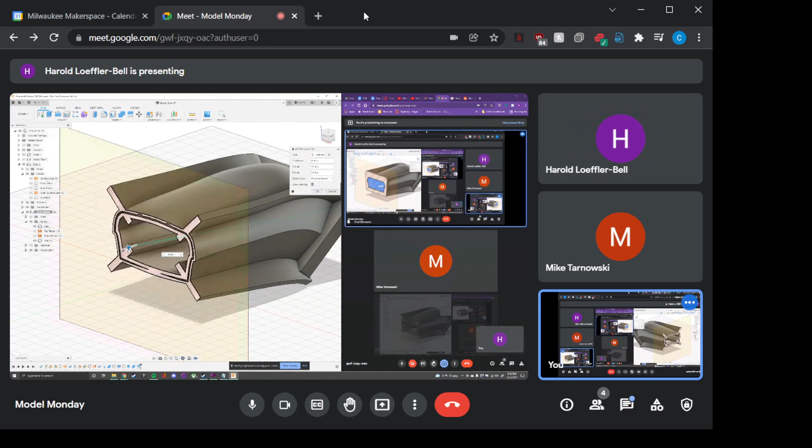Yeah, that looks good. Yeah, you can, if you hide your... oh, maybe do the section analysis trick. Yeah, do it from the side though, because I want to see if they're connected, I guess, right? There you go. Choose like this, the side. There you go. And then you can just push that arrow in. Cool. And now that's probably far enough.

So now if you turn off your front, there you go. Oh yeah. So your connection point there that you've got hanging out is like the opening. And so now I bet... did you cut away the opening on your surface as well? Yeah, so I'm curious if, yeah.

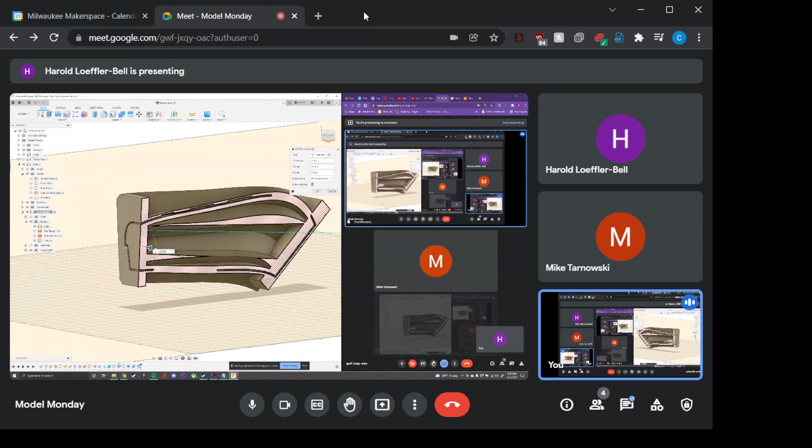Yeah, so you'll just have to use the original surface body from your body component. Like the original surface body that we lofted. That looks like that might... there you go. Yeah, the very innermost shape, the innermost surface. Is there a hole in the bottom of that? Yeah, turn off your... There you go. Yeah, it doesn't look like there's a hole in the bottom of that, right?

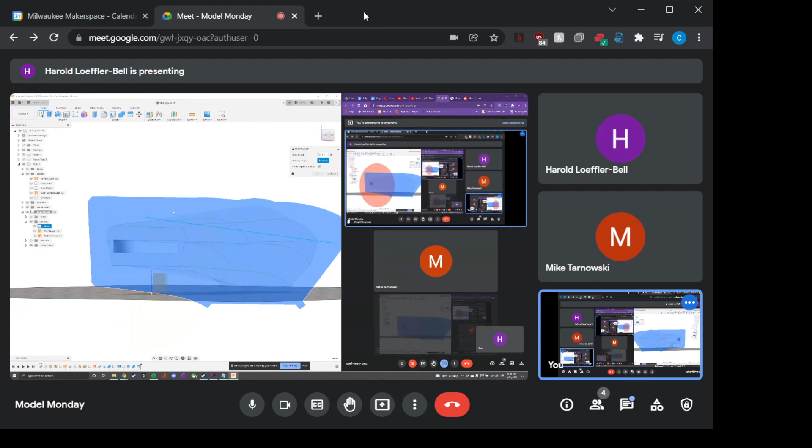Yeah, so you should be able to use that surface to split away your mold. I would use that whole, instead of that face, use that whole surface body. Yeah. There you go. And now in theory, oh, you still don't have two bodies. Right. I was hoping you'd have like an inner floating bit that you'd be able to turn off.

But it could be that as you continue on and go forward, like cutting up your side flanges, that inner part that's kind of floating on the inside of your mold will just disappear. Or you'll be able to delete them as you cut up the side parts of your mold. Yeah.